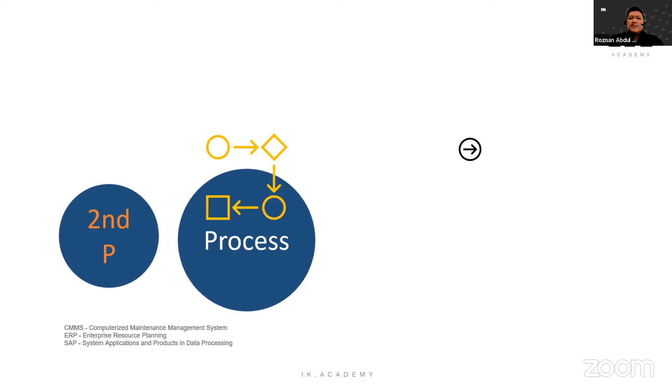Okay, in any organization, we have a business process, and for the technical people, maybe we have a specific process in terms of maintenance process or project, or even the operation or the production. So most of the time, or normally,

organization, they will use tools, business tools, to facilitate these processes. And under the processes, they have procedures, and then work method, and then work order. So these tools sometimes they are quite independent, like CMMS, which is Computerized Maintenance Management System, and even like ERP, Enterprise Resource Planning, example SAP, System Application and Products in Data Processing.

So these tools are actually meant to facilitate our administration to manage and to plan what we have to do to achieve the objective. But in terms of the usage, the operator like us, we have to be disciplined to key in the data, to update the data so that the system are up to date.

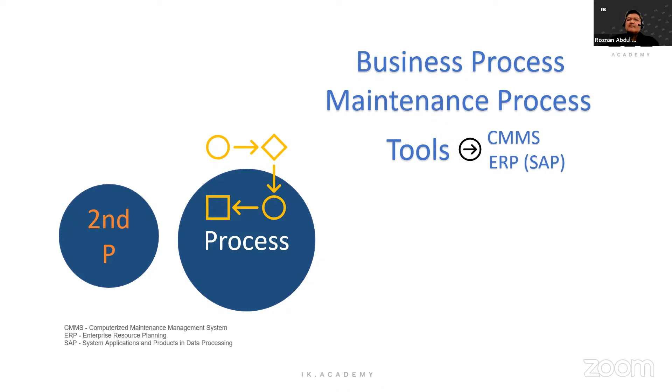So these are the uses if we have a very integrated system. So everything is integrated where the operation and maintenance manual are inside there, the schedule, the records, method, safety, quality, and also the parameters of the equipment.

And also the inventories, ordering of spare, material, consumable, and also the package must maybe also having a procurement or logistic process, budget, and also approval system, because the approval sometimes may need a few level from the user level to the engineers, to the managers, or even to the power plant manager, or to the plant manager. Or sometimes if the budget is very, very high, maybe need to be approved by the board of the company.

So everybody actually has a role to update the system. Example, even you are managing the warehouse, it's very important to update the level of inventory, because if it's not updated, when we view the inventory, it looks like the inventory are enough, but then in actual the inventory or the quantity of the parts or material are not according to the actual on the shelf.

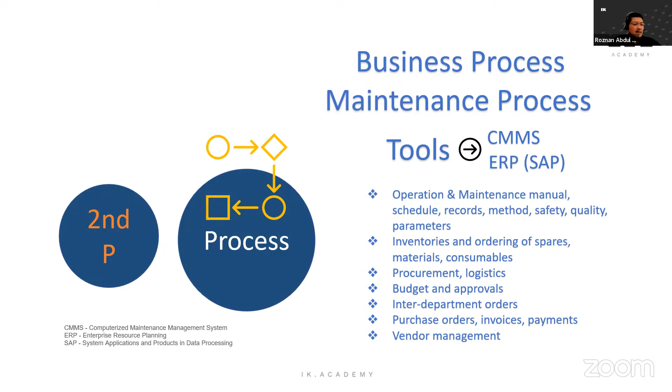For maintenance, there are also processes for the maintenance, and these are typical types of maintenance. We have a preventive or corrective maintenance. Under the preventive, we have a condition-based or predetermined, and this one is based on schedule.

And for on condition is a schedule, on request, or on continuous. Corrective, immediate or deferred. So it depends on your organization or your maintenance and operation department to decide whether which maintenance type that you want to adopt, or maybe you need to combine everything together.

Example like on condition, you can do a condition monitoring program like the thermal imaging or vibration analysis or oil analysis. So this one will be based on a condition where you have to track the condition of the data. And like the predetermined, you need to do a schedule whether the condition is okay or not okay. You have to change the spare part or the material.

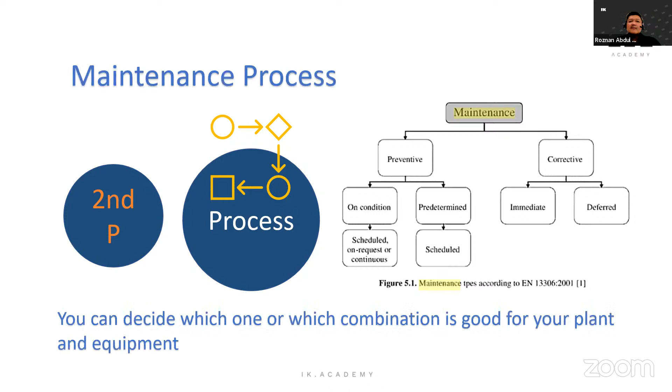Okay, the definition of maintenance. Maintenance is a combination of actions intended to retain an item in, or restore it to, a state in which it can perform the function required for the item to provide the given service.

There are two types of maintenance action. Actions oriented toward retaining a certain operating condition of an item is preventive. Action dedicated to restoring the item to said condition is corrective.

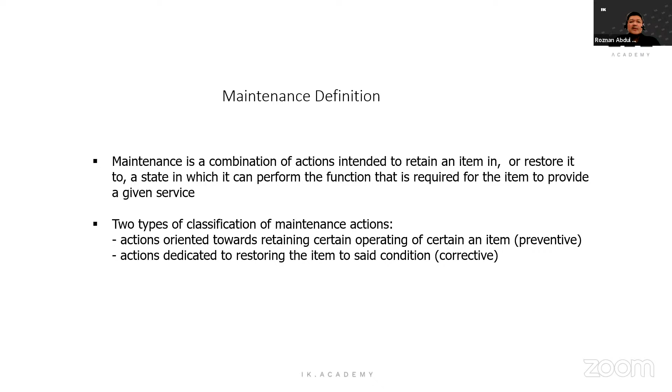Since our session is quite short, I won't go very deep into the maintenance definition and also the types of maintenance. Next is the maintenance level.

You have level 1, level 2, level 3, level 4, and level 5. Level 1 is autonomous management, where you have cleaning, inspection, lubrication, simple repair, and replacement. This may be daily inspection or weekly inspection.

Level 2 is corrective maintenance: equipment cards removal, solving equipment abnormalities, fault diagnostics, and some minor repair. Level 3 covers preventive maintenance, overhaul, training, and standardization.

Level 4 is maintenance prevention, improvement, early equipment management, and new equipment technique and systems. Level 5 is where you need to hire an outside contractor or even the OEM to do repair or maintenance for your plant equipment.

So again, it's up to your organization to decide how many levels of maintenance are suitable for the organization or the plant.

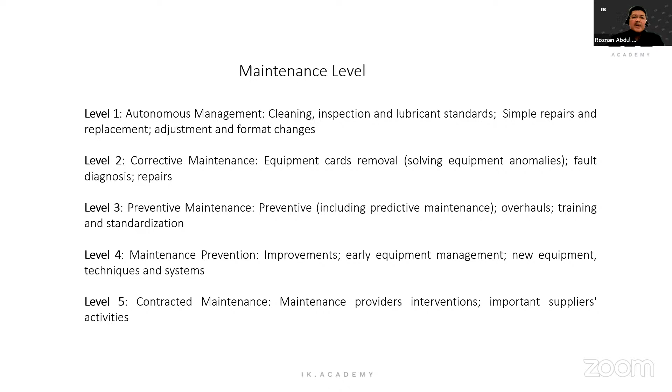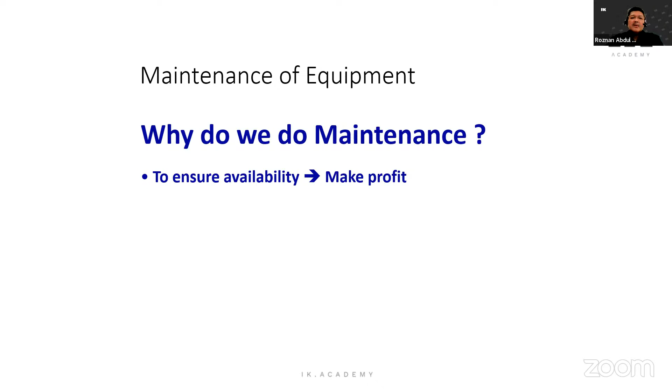Okay, this is quite basic: why do we do maintenance? First is to ensure availability. Again, the end result will be profit. We do not want to disrupt the production or the operation.

And to ensure reliability, yes, to avoid breakdown, and to avoid damage to equipment. We do not want to damage the equipment because of simple maintenance issues. If the equipment is damaged, the end result may be more expensive to repair.

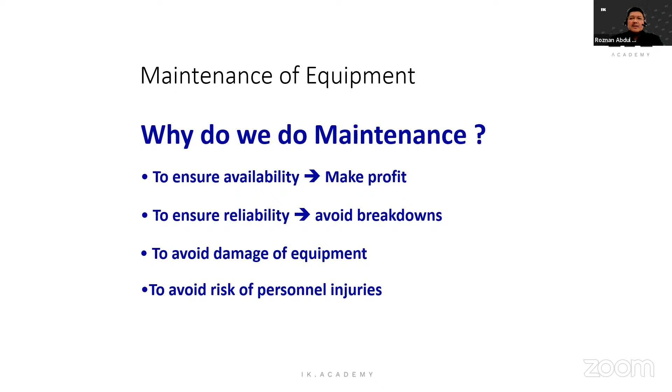And to avoid risk of personnel injuries. This is also quite important for the safety of personnel, because if some equipment fails, it's not only damage to the equipment, but it may also give injury to the personnel. This we do not want to happen.

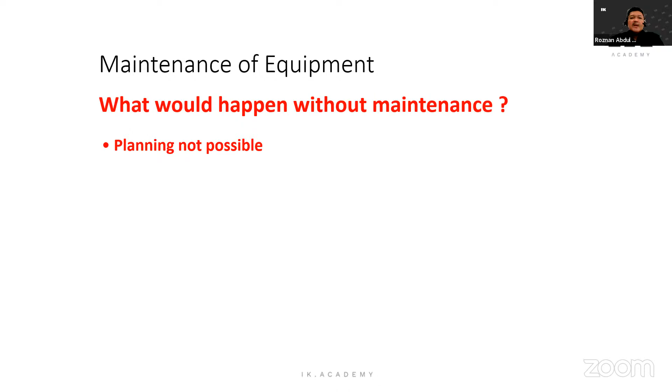Okay, what would happen without maintenance? If we don't have maintenance, planning to do maintenance is also not possible, so we just wait for the equipment to break down.

This is an unplanned or unforeseen plant outage. This is quite serious because it will disrupt the plant production and also maybe the operation of the plant.

Again, there's risk to the equipment and also to personnel, and of course increased cost and consequential damage. This can also be a catastrophe, because sometimes the damage can cause other damage to other parts of the equipment or to another piece of equipment. So we would like to avoid this happening to our equipment and our plant.

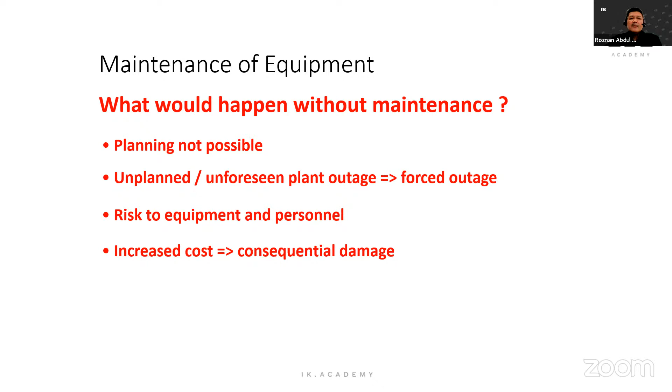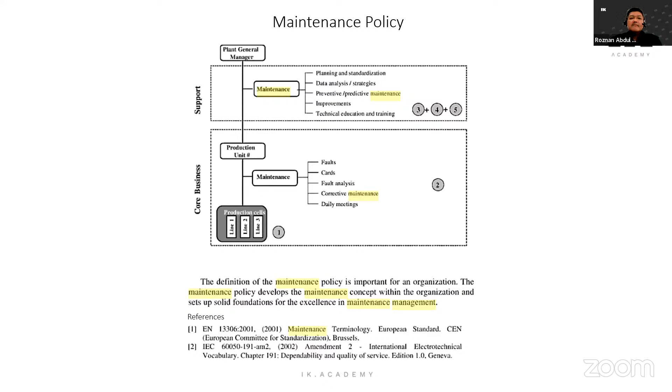Okay, next is planning. Planning is also important when operating or doing maintenance for a plant. We need to plan for the maintenance, whether we execute a short maintenance or a long maintenance that requires a shutdown.

Short maintenance may not need to shut down the equipment or even the plant, and sometimes only a certain type of equipment. Or if you have redundancy, we can shut down one pump, do maintenance on it, and put on another pump.

Also important is procurement of spares. This must be planned properly so that it matches your maintenance program and schedule when you want to replace the spare.

And procurement of services. Sometimes you need to hire outside resources or manpower or specialists from the OEM. This also must be planned so that the time you need the manpower or specialist matches the time you want to shut down the equipment or do a long shutdown.

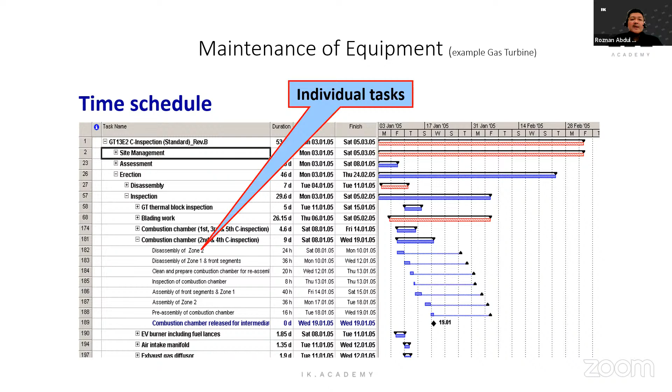Okay, we have individual tasks here, the duration of each task, and how the tasks are interconnected together. This needs a lot of coordination, supervising, and also some skills in project management.

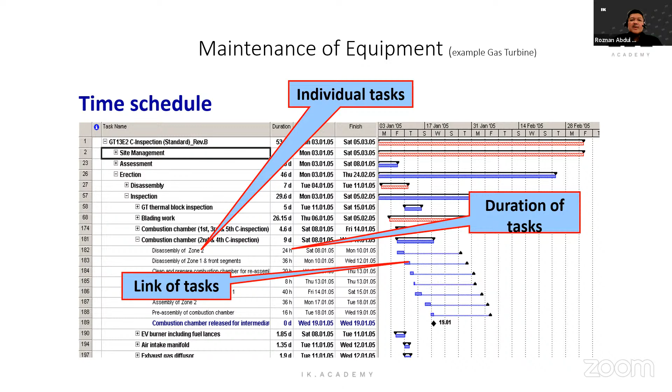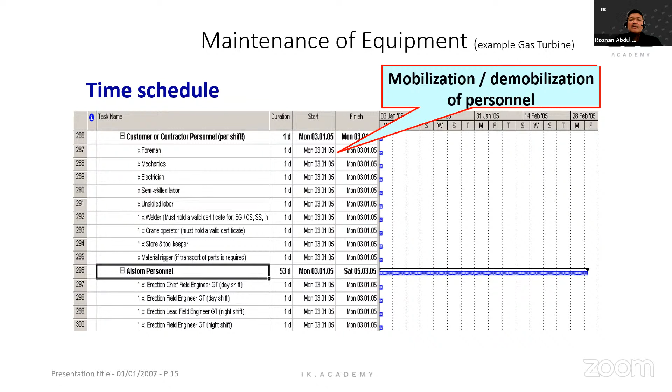Okay, this is a time schedule. The schedule must also account for mobilization and demobilization of personnel, number of people, the lineup, and number of personnel. This must be carefully planned before you do any long shutdown.

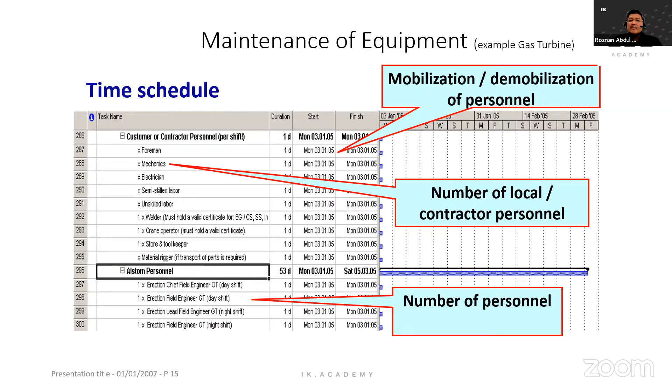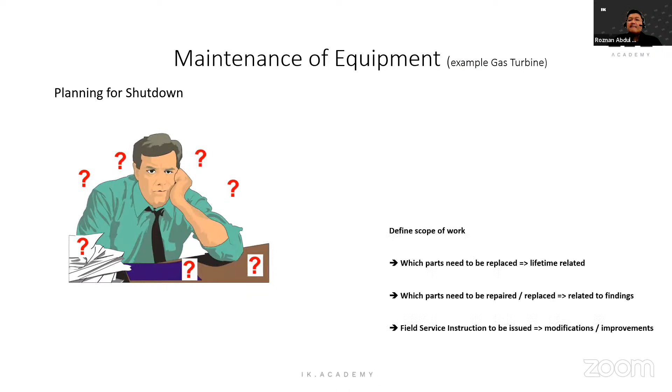Okay, in any task of doing maintenance, or even if you want to do a long shutdown, there is the definition of scope: which parts need to be replaced, lifetime related, and which parts need to be repaired. Do you have a specific instruction to be issued to the person that will be doing the job? Do you have any modification or any improvement, or do you have any specific safety requirement that you need to follow, such as confined space or hot work, where you need to follow a certain procedure before you can do the job?

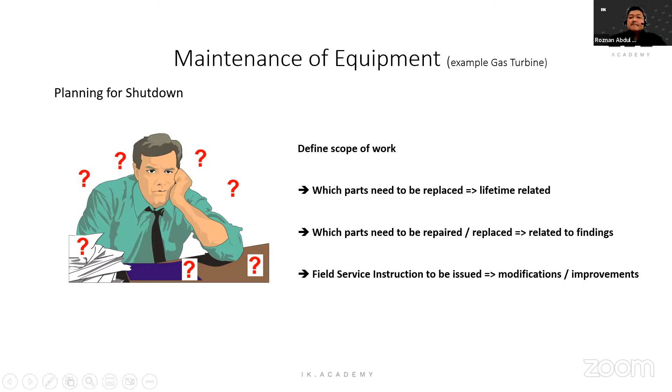Okay, one thing that is also important is the material. Some spares may take a very long time to arrive, so you need to plan this very, very carefully. You need to check with the supplier or the OEM how long the delivery time is. This needs to be planned early so that your spare parts or material can arrive on time, because some OEMs only have a small stock, and if you order based on urgent delivery, they may charge some premium. So you need to discuss and check with your OEM and also the supplier for your material and spare parts.

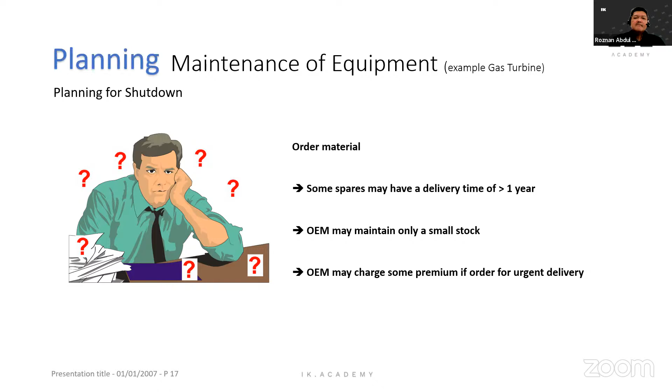Okay, in terms of maintenance, sometimes we need to use a very special tool to do the maintenance, like opening the equipment, opening the casing. So maybe you need special equipment like a hydraulic tool. These tools are also sometimes limited, and the availability must be checked with the supplier so that these tools can be delivered to your site, matching the time that you require them. So all this must be coordinated.

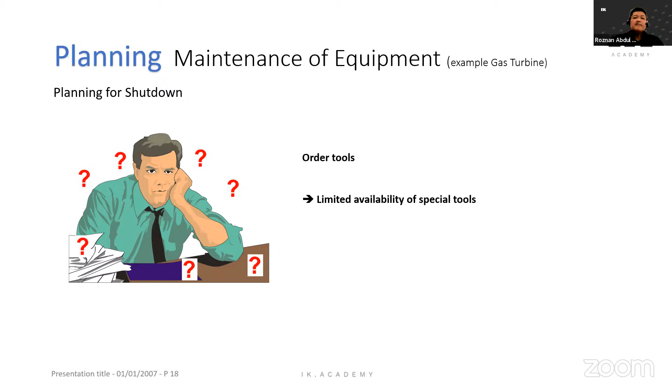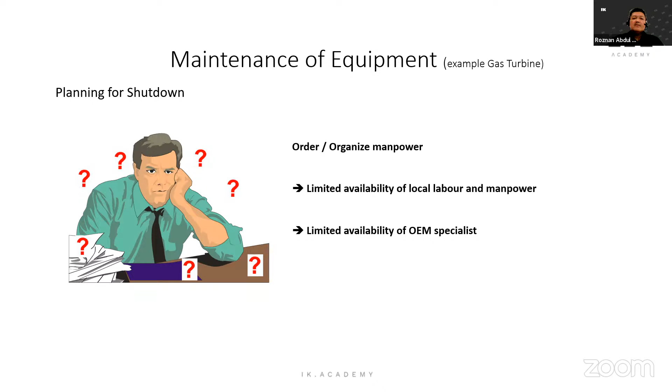Okay, another is manpower. Manpower also must be planned, because sometimes the local labor and manpower are limited, and OEM specialists can also be limited. So this needs to be planned early. Okay, planning may start 20 months prior to shutdown. This depends on the manpower availability, the spare part availability, and tool availability. So you have to plan carefully so that your shutdown or even your maintenance can be carried out smoothly.

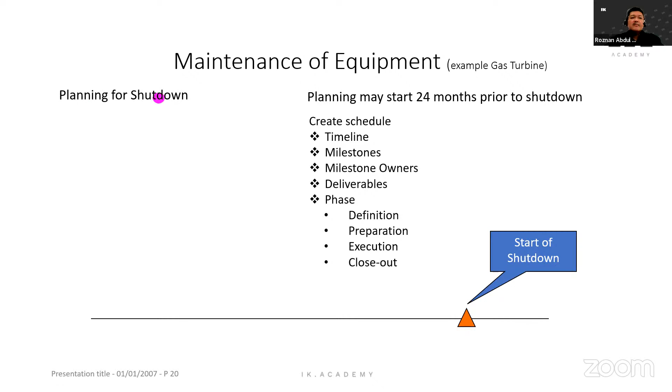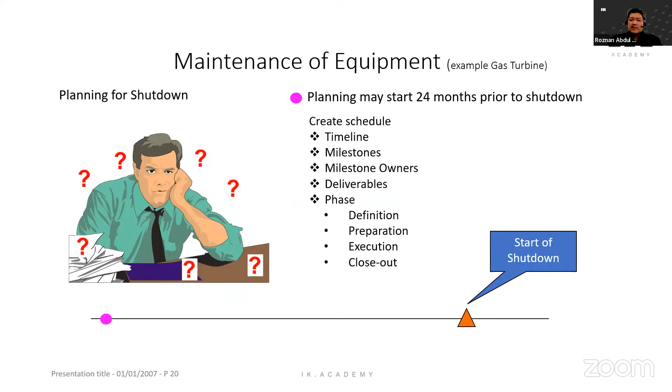Okay, for this planning, you need to create a schedule. In the schedule you need to have the timeline, the milestone owner, the deliverable, and certain phases of the planning: definition, preparation, execution, and close out. Again, it depends on your organization which planning or template format you want to utilize, suitable for your company. This is only an example of the planning.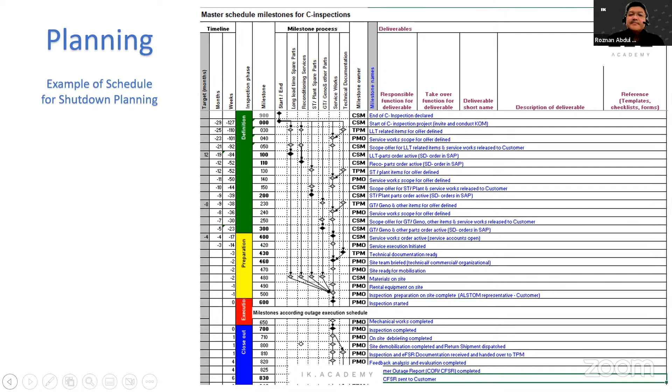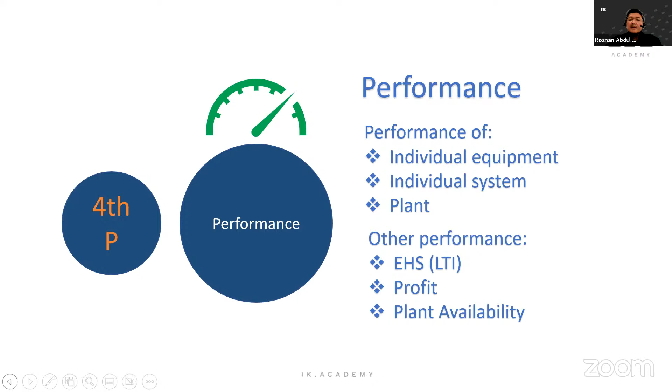Okay, once you have done your maintenance or your services, or even on a daily basis, your equipment must perform well, so that whatever maintenance or services you have done, the end result is performance. So you need to monitor the performance of each equipment, each system, or even the whole plant. And you also need to have performance on safety and profit, and also plant availability.

Okay, in terms of individual parameters, you need to monitor the operating parameters, doing condition monitoring using NDT diagnostics. So you need to check the temperature, pressure, flow rate, vibration, noise, and you can check using a thermal image. You also need to check for corrosion and leaks, and, like a power plant, they need to have power output efficiency.

And sometimes we need to do the performance test. So depending on your plant, what type of performance you are looking for. And also related to performance, you need to check any signs of deterioration, like maybe your power is already deteriorating. You have less power compared to one year ago, and then you have less flow rate. So sometimes you need to have a diagnostic, NDT, measurement, vibration, thermal image.

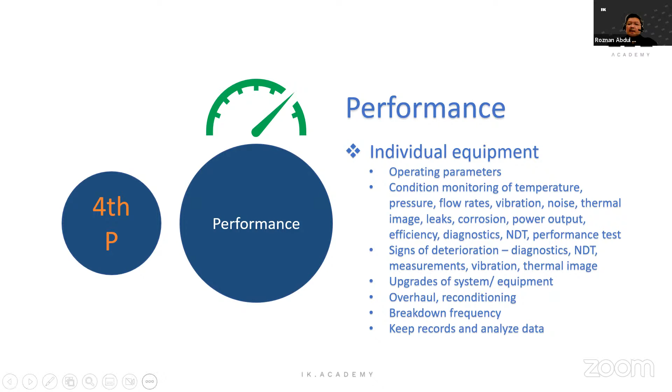And sometimes you need to upgrade your system or your equipment so that you can gain back the performance based on the original specification of the equipment or the whole plant, where you need to do maybe overhaul, reconditioning, and you also need to monitor the breakdown frequency, which equipment have a lot of problems and which equipment are quite reliable and have less breakdown. And also you need to have a record to analyze the data.

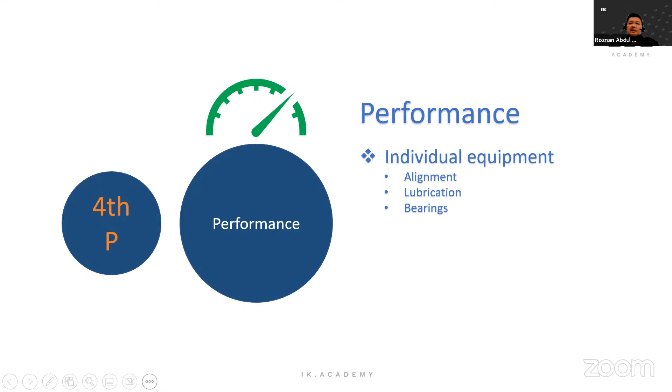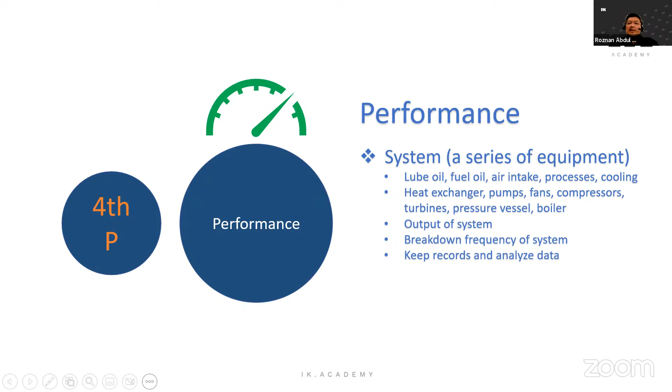Okay, under performance, you also need to monitor the alignment, the lubrication, and also the bearing condition. These are basically common factors that you need to monitor for rotating equipment. For the whole system, maybe you need to check the lube oil, fuel oil, air intake, the processes, whether it's smooth or not. Then the cooling system, check the heat exchanger, pumps, fans, compressor, turbine, pressure vessel, and boiler. And also the output of the system.

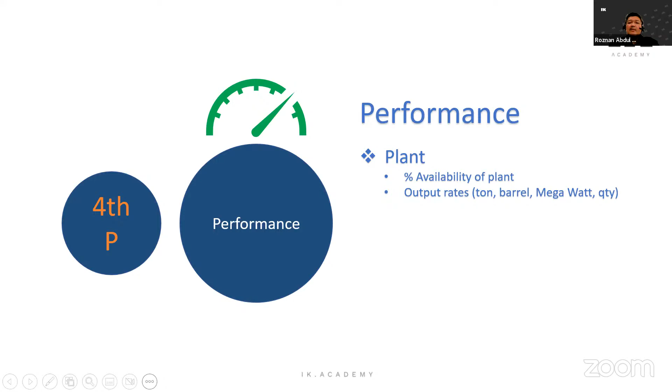Okay, for the plant, maybe it depends on the plant and also the organization. Maybe you have the percent availability of the plant that you need to achieve, and then maybe you need to have an output rate, maybe in ton or barrel or megawatt, and other quantity rate or output rate that you are bound to deliver. And also for performance, you can also have environmental health and safety, and then the target revenue and profit, and also miscellaneous KPIs set up as targets by your organization and your company.

And of course, the end result is to have a good profit, whether it's complying with the maintenance budget, operation budget, and also the plant budget. And also under profit, in any organization, we need to abide by the national regulation and local regulation so that we can avoid penalties. Penalties can actually reduce our profit, such as for environment or safety. So we do not need to waste our budget or money in terms of abiding by the regulation.

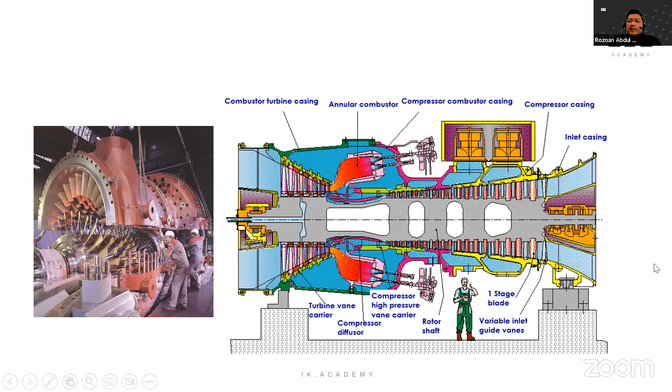So this is where the 5P that I mentioned just now can be applicable, where you need to have the spare parts on time, you need to have the manpower or the specialist on time, you need to have the special tool to open the casing, and then you need to have the equipment and material. Everything must be ready before the inspection, or just in time during the execution phase. So it depends on you in the planning to identify all this, and also to identify how much coordination and the timeline you need for the preparation and the execution.

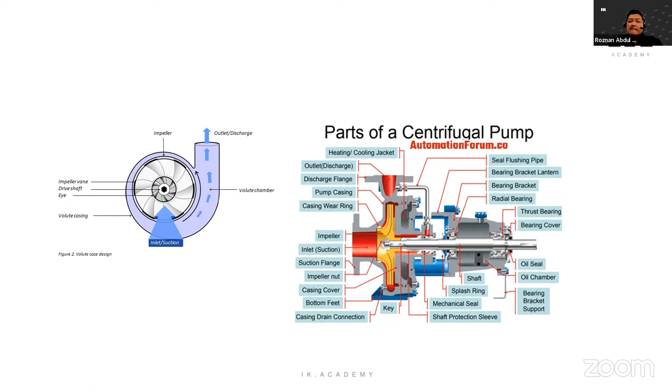Okay, this is a typical sample of a centrifugal pump. It's similar to the turbine, just maybe smaller, but it still has components and parts that need to be checked, repaired, or replaced. So all this must be planned and coordinated carefully so that any maintenance, small or big, can be done properly and smoothly during the execution. Okay, I think that's all from me.